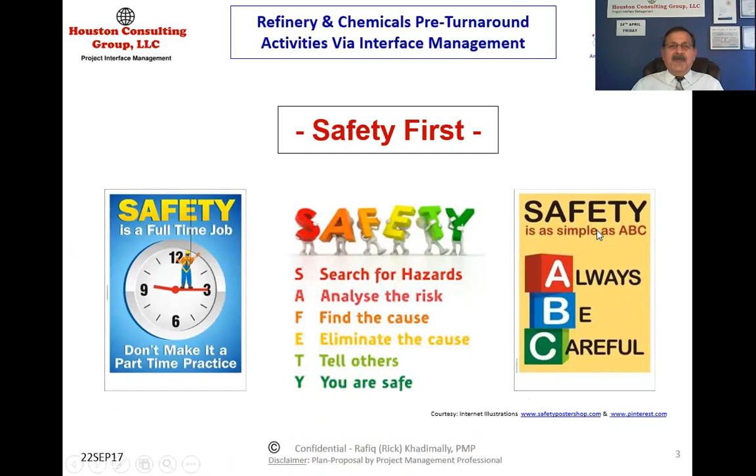Now what is this all about? The abstract and summary is that this plan is for tracking pre-turnaround activities for smaller to medium-sized refineries and chemical plants, maintenance projects, unit upgrades. I applied my experience as interface manager on offshore projects, interfacing with everybody. I'll let you know about that experience, some of which is already uploaded. I will couple this with supply chain management, and similarity is given to the offshore mega projects.

The plan is meant for small to medium size. By the way, pre-turnaround, all these refineries here in Houston, everybody has got their turnaround management. They are doing a superb job. I have tried to put it up in a presentation form, so this is what my thing is.

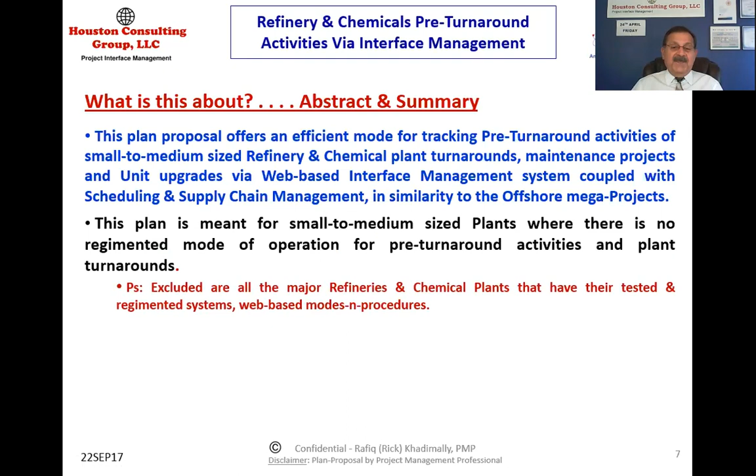It excludes the major refineries. Major refineries have already got their very regimented systems. It ensures a defect-free and picture-perfect completion of all requisites. There are a lot of things prior to the turnaround coming up, right? I used to be the project engineer doing some of the repair works and all that, but during the turnaround...

They would give me the major repair work, like the retubing of the debutanizer heater, installation of a block isolation valve on top of the crude distillation tower, adding a fin fan cooler—all those projects.

What I would do during that time is be in the tank farm, converting storage tanks from fixed roof to floating roof, or putting aluminum screens inside, repairing the bottoms, and all those kinds of things. They would give me this work, so I would plan it all so it could be bucked up during the turnaround period.

During turnaround itself, the refinery maintenance manager becomes the turnaround superintendent, and I would report to him. I had some selected maintenance and upgrade projects which I would do during that period. A turnaround normally lasts around 3 to 4 weeks in a refinery.

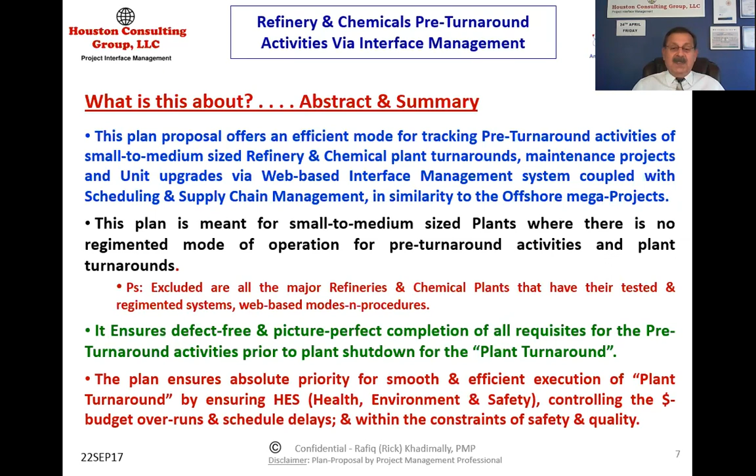This is basically starting from the EPCI projects that I did offshore, and there I learned interface management.

In one way or another, all these refineries - Exxon, Mobil, Shell, Valero - they are having their turnaround superbly managed. They have their own software to do the job and all that.

After refineries, I moved into offshore projects. If I was project engineer, then I became the interface manager. And that is what I love, left and right.

You could see there are other presentations also. This very presentation I have made, you could call it backdated, to do the pre-turnaround work based on interface management, so there are no hiccups left over when you are doing the plant turnaround during that famous period of time.

This presentation is based on extensive refinery experience - that is my backbone basically. The attempt is to amalgamate the interface management experience from the offshore oil and gas mega projects.

I have done quite a few - seven mega projects on the offshore side - jacketed platforms, floating platforms, drill rigs, and lately LNG liquefaction projects, but we only went up to FEED, okay?

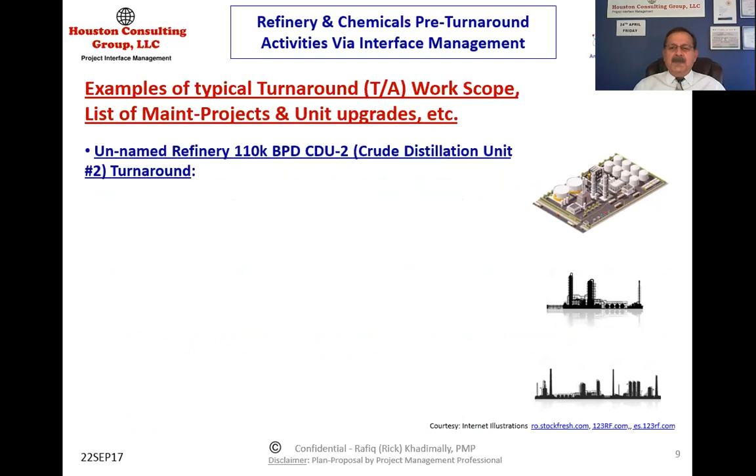I have picked an example of a turnaround in a maintenance refinery - an unnamed refinery, around 110,000 barrel crude distillation unit number 2. It was a turnaround, and there was some scope of work which I did actually.

By the way, all these presentations are based on actual work that I have done in my career. So that includes all the things I am mentioning here: crude desalter, distillation tower and trays, and steam air decoking.

I'm going to make a separate presentation on each of those, and then I'm going to upload them. Retubing of heaters was mainly given to me.

Debutanizer heater, a vertical heater which had 3 coils, with a convection section and all that. You remove the cone, and then first put the ring around those - the old one you have cut at the weld point.

You lift all the coil there, but prior to that, in my fabrication yard, the new coils were being welded. The U-bends were mostly nickel chrome, molybdenum, half moly, nickel chrome vanadium type, depending upon whichever specifications were required. I would bring them in, hire the contractors, and be responsible for that.

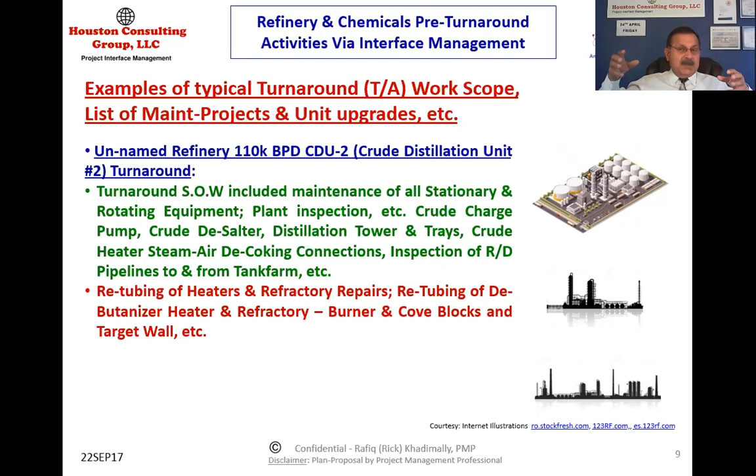During the entire turnaround period, it would be my responsibility to complete the work and be in very direct liaison with the turnaround superintendent.

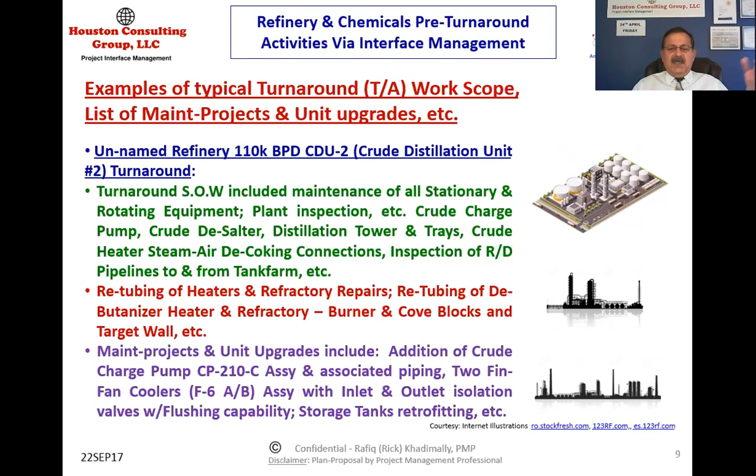I have mentioned some of the other things which were done - there was another crude charge pump which I had to install, two fin fan coolers which I installed, and flushing capability. And then I have got the presentation overview.

So basically we are talking about three keywords: refinery and chemical turnarounds, pre-turnaround activities, and tracking via interface management, which is my area basically.

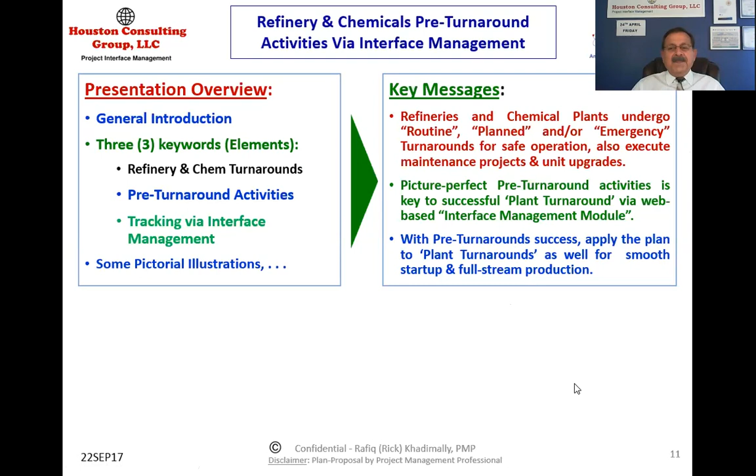The main thing is every client, as well as in the offshore projects, every client and the EPCI companies all agreed that poor interface management was the basic root cause of all the delays and budget overruns and all that. And I got quite a lot of excellence in that one.

Most of my supervisors will not let me go. I moved from one project to another with them. I would take the name of one of my supervisors, his name is Phil Hawley. I was with him for 7 years across around 2.5 projects before he left. This is the offshore project I'm talking about. All my experience is coming from that wizard. He's currently at Technip FMC as a senior project director.

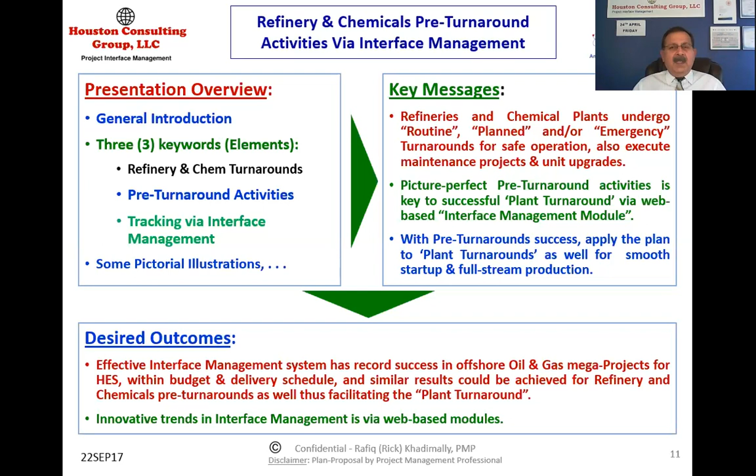Yeah, I would certainly mention his name. I always took his permission during my presentations, asking Phil if he minded if I used his material. I want to give him the credit. Phil Hawley is on my LinkedIn, so you could check him out.

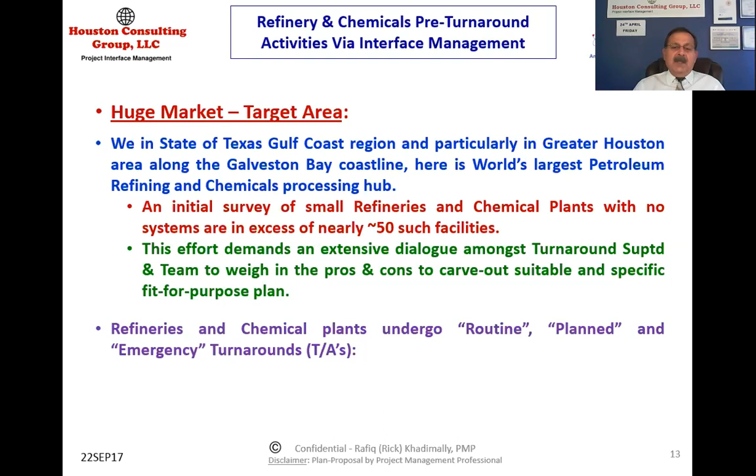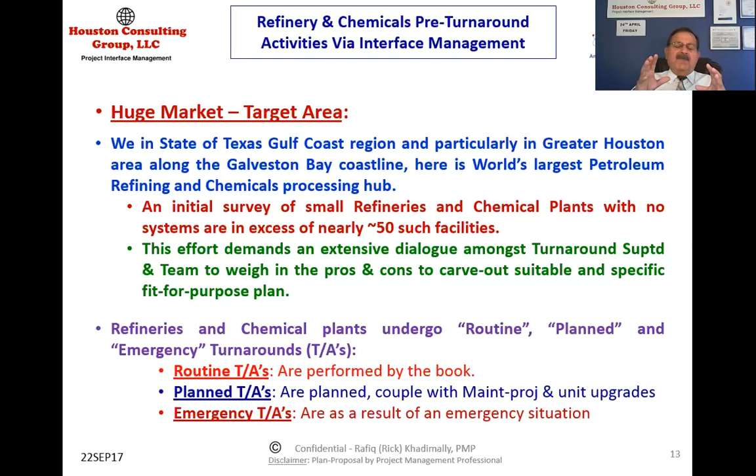Okay, let's talk about that. This one has got a huge market, which is small to medium sized refineries. We have close to 50 such plants, in the state of Texas and the Gulf region. We're talking about all these plants and the routine. There are three kinds of turnarounds: routine turnaround, planned turnaround, and emergency turnaround. I was engaged in all three forms from time to time.

Okay, and then I've added the Nelson Complexity Index. I'll give credit to the Valero guys in particular. They bought refineries from Shell and Exxon and all that, but my God, they went into superb complexity. So their NCI kept on increasing as they added a lot of units. I've added that one in particular—this is coming from the internet, the complexity factor—just for everybody's information.

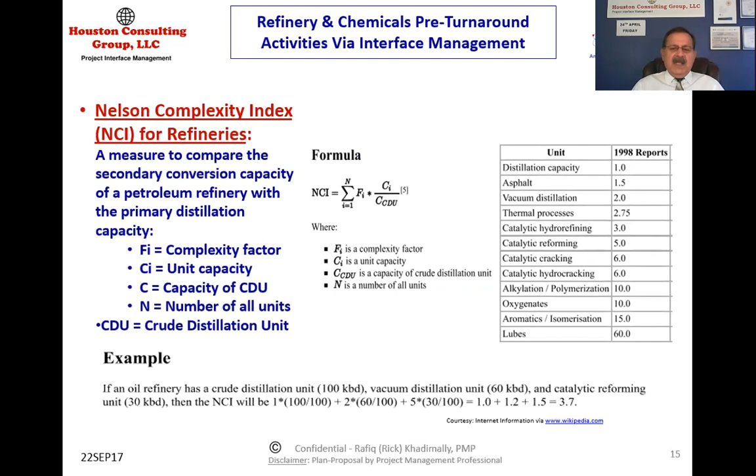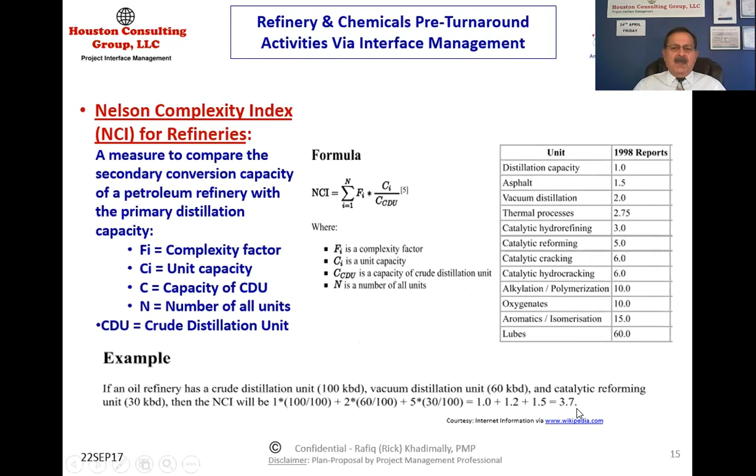So for a refinery which is 100,000 barrels, the NCI number comes out to be equal to 3.7, if you have got those units which are already listed here, okay?

Then I'm talking about the plant turnaround, which is basically a project, okay? And the project manager is the turnaround superintendent. That's why there's a lot of activity that has to be done prior to the turnaround—normally 8 to 10 months—because you have to order a lot of things, and he's the project manager.

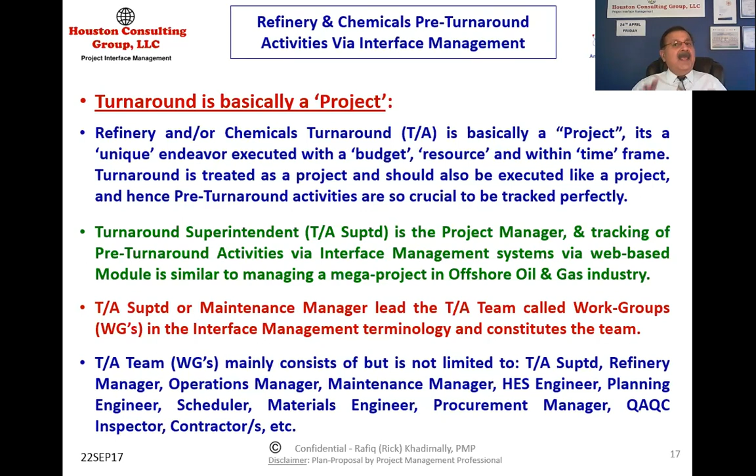And then I've mentioned the work groups, the way exactly I have them in my interface management—the different work groups we're talking about. They include the turnaround superintendent, who reports to the refinery manager at that time, the ops manager, and sometimes the maintenance manager himself is the turnaround superintendent. There's also the HES engineer, planning engineer, scheduler, materials engineer, procurement manager, QA, QC inspector, and the contractors, who are also part of the team at that time.

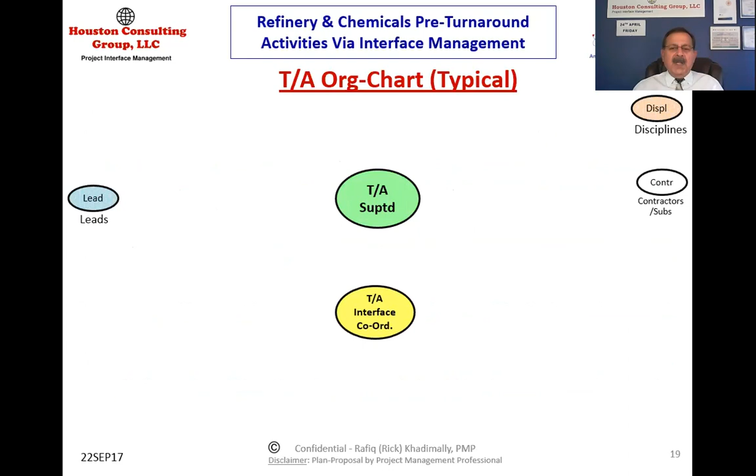So in the organization chart I made, I look at the turnaround superintendent right there, and my role would have been as turnaround interface coordinator. I've got leads on one side, contractors on the other. The turnaround superintendent reports to the operations manager and maintenance manager, in case he isn't the maintenance manager himself.

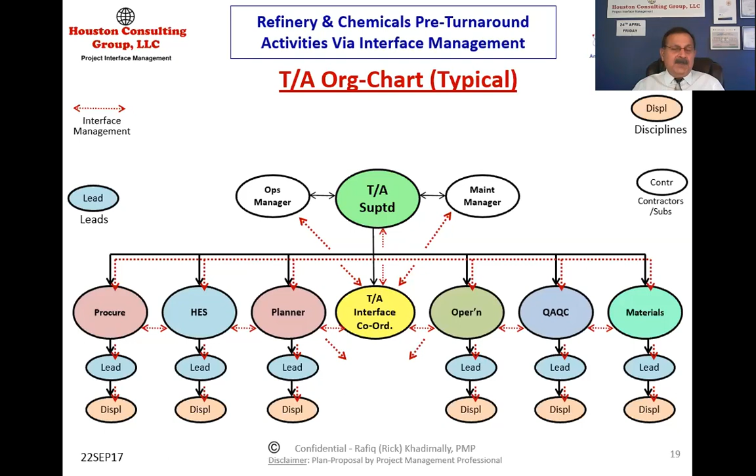And then I've got interface management, shown here with a red dotted line. You have procurement, HES, planner, operations, QA, QC, materials—they all have their leads, and this is their direct chain of command. The red dotted line represents the interface role, which I used.

This is the formula, basically my org chart, which I used on my offshore projects. I created that during the time I was in the refinery, showing how I would do interface management there. But my title at that time was project engineer, understand—project engineer doing major repair of storage tanks and those kinds of projects.

During turnaround, some special projects were beyond the scope of routine maintenance. They clean the bundle, retubing, and all that kind of thing. But those bigger projects, they would give to me, like debutanizer retubing. I'll contact AP Green or two or three more companies to do the refractory wall, cove block, burner blocks, target walls, all that. That had been my practice.

During the turnaround, once I finished my project, I'm on standby. The refinery, at that time, is turned on for production. Once that is done, 72 hours, 96 hours, I'm staying in the control room with my crew making sure everything on my projects is okay. A turnaround superintendent says, Rick, thank you, you did a great job. Then I go back to doing my own projects.

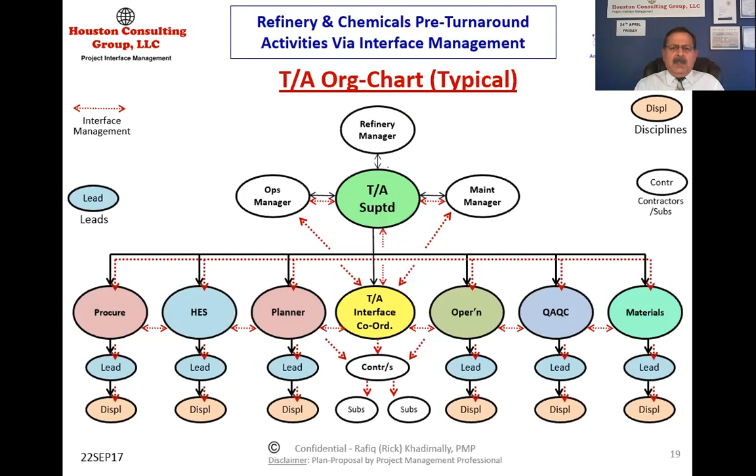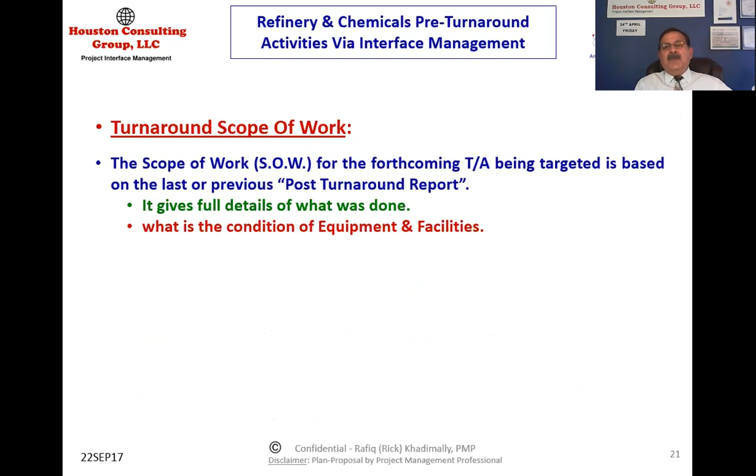So this is the one I mentioned to you, the turnaround scope of work. Now, how do you create the scope of work? First of all, you have a post-turnaround report coming from the previous site that you add in. Then you have a projected work scope, which is known. Then you have some unknown and unforeseen scope of work. All those things combined become the overall scope of work.

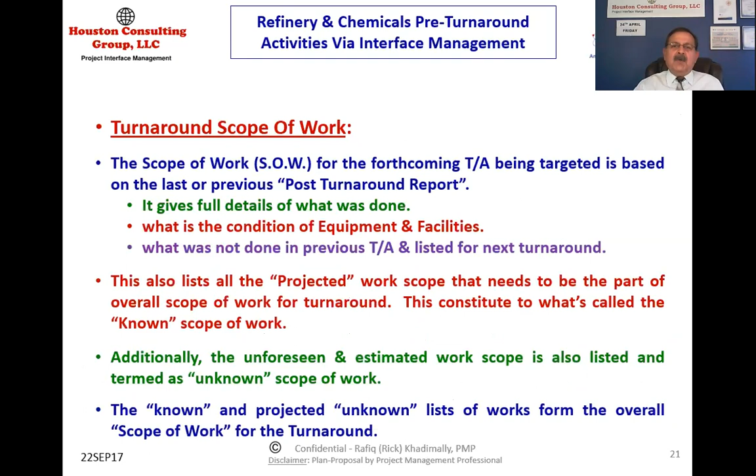Then you are talking about the procurement. Again, the post-turnaround report is the basis of the next turnaround scope of work. Then whichever needs to be purchased, owner-furnished equipment, some pressure vessels, some heat exchangers will be changed, some retubing. All of that, and the receive-on-site date was very important.

Contractors' scope includes some of the piping. The contractors who are helping us will have the piping fittings, so smaller tiny items used to be included in their scope based on our specifications. But the refinery would give the basics, the owner-furnished equipment, as I mentioned. If some pressure vessel has to be replaced from within the refinery, or some heat exchangers have to be changed, retubing is a different thing. Pressure washing, retubing, cleaning, those things are common in a routine turnaround.

Any engineered packages will have to be obtained ahead of time, including scaffolding, refractory, manpower supply, and all that.

Now I'm talking about the preparation for the RFQ, which I would do for the turnaround contractors. So here I am going to first prepare the scope of work. I have the RFQ made for it, and I have a cost-plus rate sheet. I had some fixed lump sum for the known scope of work, but then I will have all the items which are unknown, with different rates basically depending hourly.

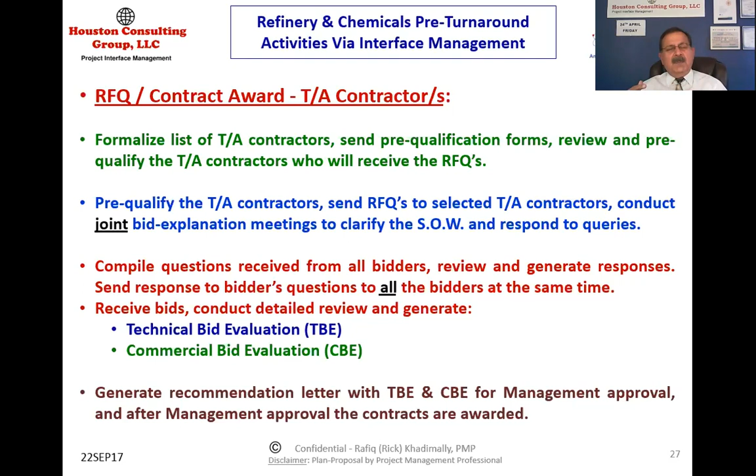At that time, we are going to read out contractor A, he has that amount of price, this one B, and all that. This is the way we are going to be letting everybody know. So technical evaluation would come to me, commercial bid evaluation will go to the procurement manager, but then both of them will be combined and we will make one presentation for the recommendation for the approval of the management. Once that is signed, now I'm talking about this one.

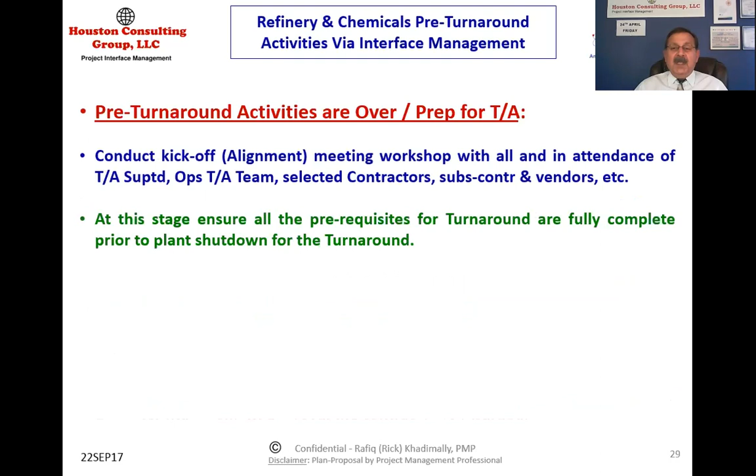We will conduct the kickoff meeting once the contract has been awarded, and then we would have rollover from this stage onward, the operator team and the contractors managing that activity for the turnaround.

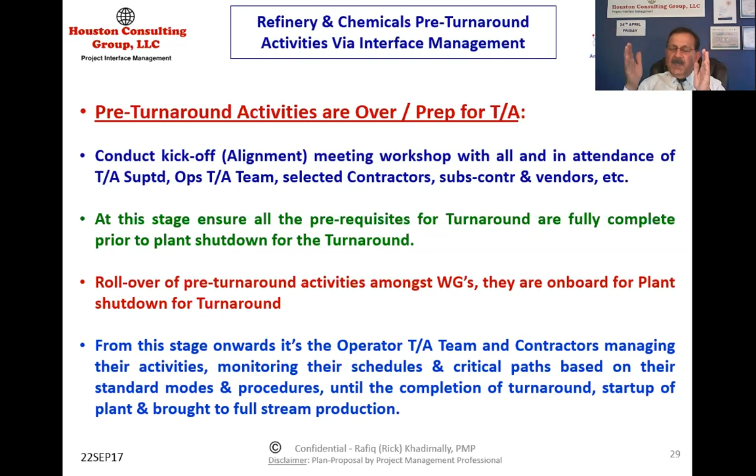So all the pre-turnaround work has been done, which is basically the backbone of the turnaround. If your pre-turnaround work has been done superbly, there is no problem that you will ever have conducting a good turnaround. Now I'm giving you a little bit about the interface management.

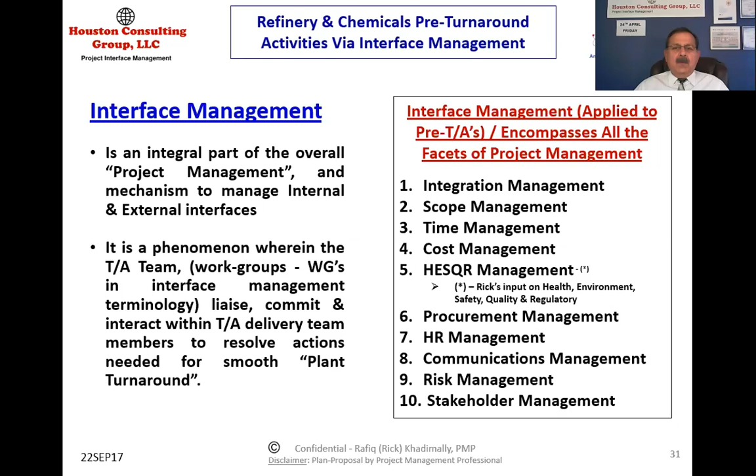So this is basically the 10th one, the stakeholder management. When I did my PMP, there were 9 of them. The 10th was not there, and the 10th is the most important, which is the stakeholder management. I have picked it up. By the way, any information which I have got from various websites, I always give the courtesy down below, and you are going to look at it.

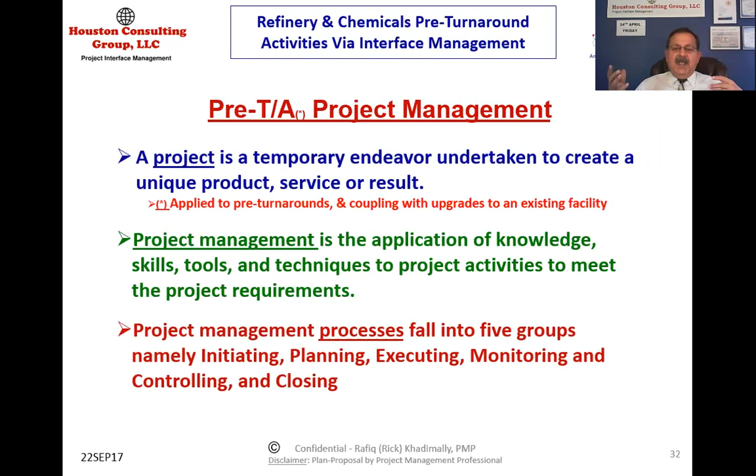Now we are talking about a project is a temporary endeavor. Everybody knows project management is the application of knowledge, tools, and skills, and all that. I'm not going to be reading out all of this one, because you people... and the project management processes are 5: initiation, planning, execution, monitoring and control, and closing. This is a part of the PMI.

So the magic of having a successful, on time and on budget turnaround - let's not talk too much about budget, because there's so many unforeseen things. When you open up a refinery, even though the past turnaround is the backbone of the work scope for this turnaround, you never know what is inside, right? So the budget, I would say, negotiated or revised budget. But the time is very important because the operations are just on top of our head. We don't want it in excess of 4 weeks or 3.5 weeks.

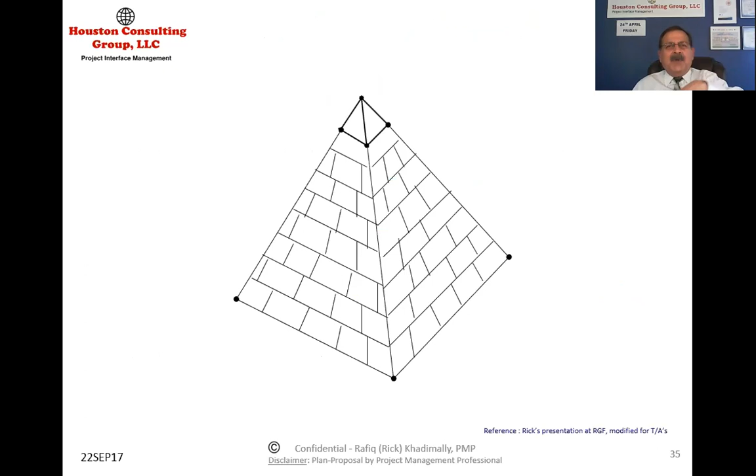Okay, so it's a typical turnaround plan, 3 to 4 weeks, right there on the live schedule. Then I'm talking about how the interface management works. This is the way I call it, a pyramid of...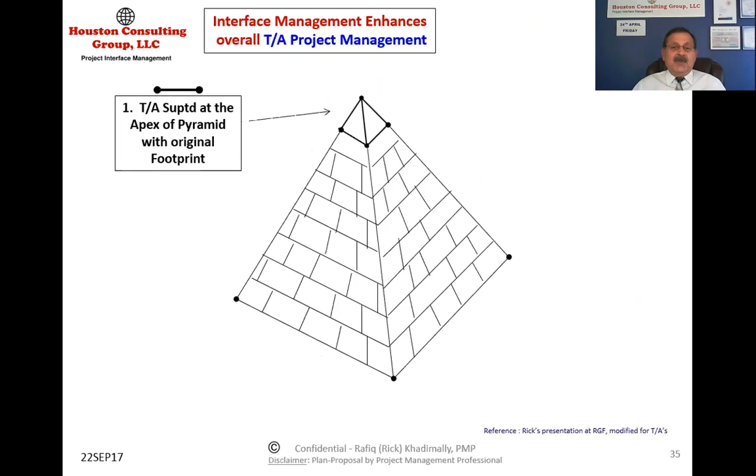Project interface management. So in the first case, we have either the project manager or somebody, it's like the project manager is like a pyramid. At the apex is a project director, and in this particular case, I made it the turnaround superintendent.

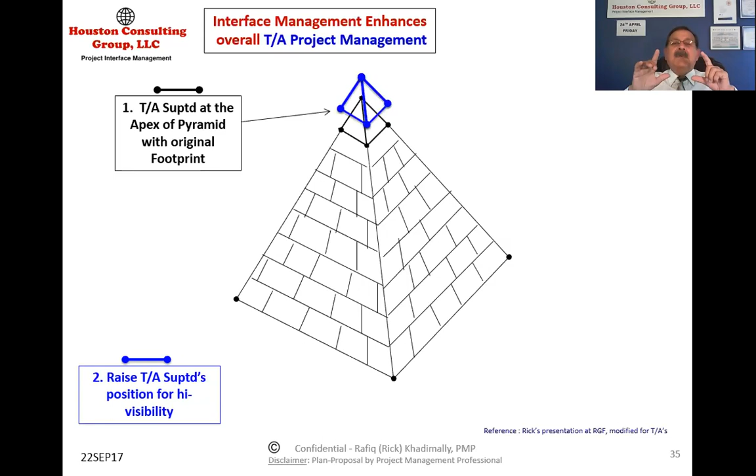Okay, I'm going to raise him up a little bit for a wider view, and I'm going to insert myself. I just got it at the back of the picture. Look, I inserted turnaround interface coordinator. I made a title for myself.

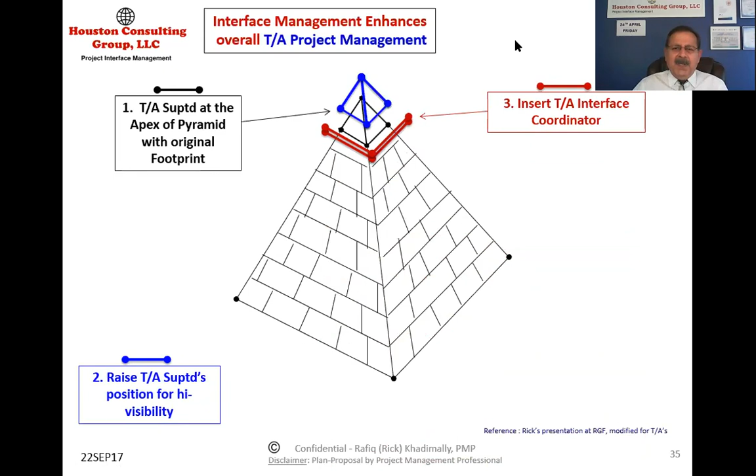And I'm going to go up a little bit, and if you look at it, his vision gets broadened. The footprint becomes an extended turnaround project management footprint, and I call it the turnaround project management pyramid. This is my idea.

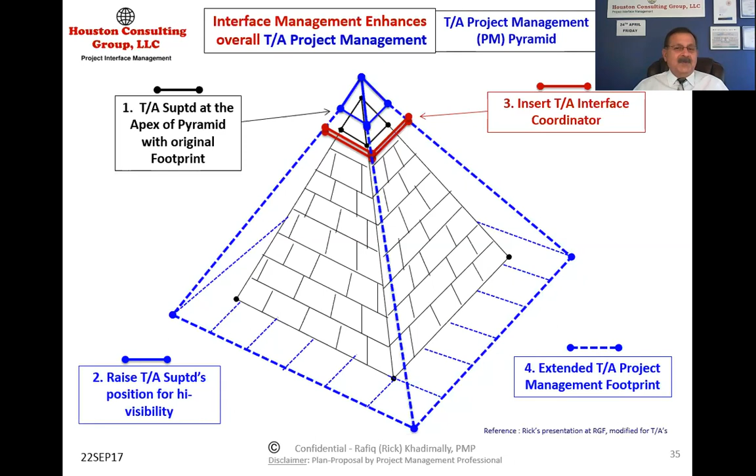In one of my interviews, I was drawing it by hand, and he offered me the job. Wonderful. And I thought this one should be in some of my presentations, and that's why I've done it. All of these are animated, and now a little bit about myself.